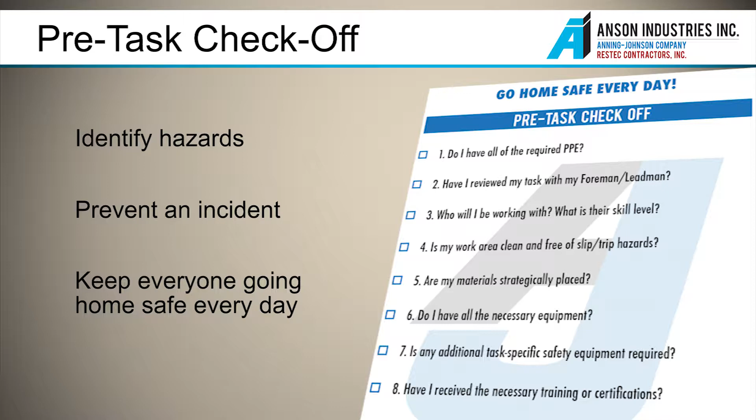If you are injured, report it to your foreman immediately, even if you are not sure if medical treatment is necessary. You will be required to complete an accident report. This will help us identify the cause and how we can avoid future injuries. If your injury does not allow you to return to regular duty, we will try to bring you back to work through restricted duty. Our goal is to make sure all of our workers receive the treatment they need and return them back to work.

Anson's core values represent who we are and provide the standard of behavior by which we conduct business. The following items are examples of the professionalism we expect from all employees. It is our level of professionalism that sets us apart from the rest of the industry. A professional is someone who lives up to the full potential of his or her capability and job title, no matter their level of education or the industry in which they work.

A professional conforms to the standards of skill, competence, or character normally expected of a properly qualified and experienced person in a work environment. Code of conduct: when working with customers, treat our customers with respect at all times. Remain positive under all circumstances. Be candid and honest in communication and conduct. Follow through on all commitments. Be prompt and responsive in business dealings.

When working with your coworkers, ensure that safety is a top priority and the focus of the entire team. Ensure that the team treats one another with dignity and respect, regardless of position, time with the company, or level of experience. Ensure that the team maintains a positive attitude, appearance, and demeanor. With everyone, refrain from vulgar language or behavior, and respect the dignity, rights, safety, and personal property of others.

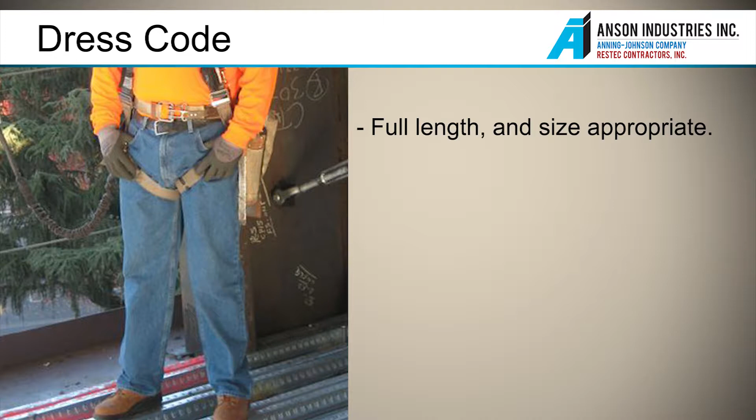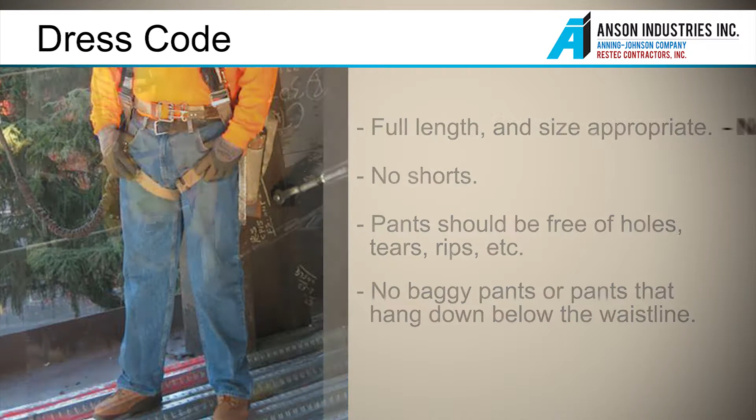Pants must be full length and size appropriate. No shorts. Pants should be free of holes, tears, rips, etc. No baggy pants or pants that hang down below the waistline. No loose jewelry. Work boots must be in good condition and free of defects.

Anson Industries provides equal employment opportunities to all employees and applicants for employment without regard to race, color, religion, sex, gender identity or expression, sexual orientation, national origin, age, veteran status, disability, genetic information, and any other classification protected by applicable law. In addition to federal law requirements, Anson Industries complies with applicable state and local laws governing non-discrimination in employment. This policy applies to all terms and conditions of employment, including recruiting, hiring, placement, promotion, termination, layoff, recall, transfer, leaves of absence, compensation, and training.

Anson Industries expressly prohibits any form of workplace harassment, discrimination, retaliation, or bullying based on race, color, religion, sex, sexual orientation, gender identity or expression, national origin, age, genetic information, disability, veteran status, and any other classifications protected by applicable law. Any questions or concerns should be communicated to your immediate supervisor or Human Resources Department immediately. Contacts can be found in the Employee Handbook.

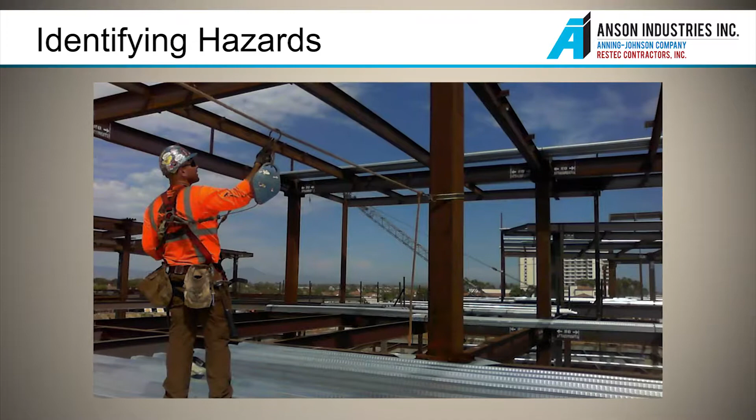We have created this video so you can become familiar with our safety policies and become familiar with the hazards on our job sites. We want you to be able to recognize and avoid unsafe conditions. We encourage you to notify your foreman of any unsafe conditions you may encounter, even if it does not pertain to our work, since it may help prevent an injury. Personal protective equipment.

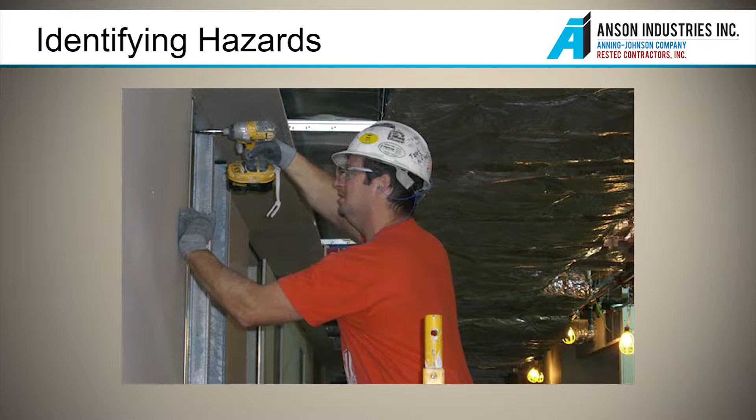It is our duty as your employer to provide you with the necessary equipment to work safely. We will provide all appropriate equipment except proper clothing or boots. The following are the types of equipment you will be required to use on our job sites.

Hard hats provide protection from falling objects or protect you in case of a fall. Hard hats must be worn at all times.

Safety glasses are required when cutting, welding, grinding, chipping, or using power tools. They can prevent flash burn or objects from getting into your eyes. Safety glasses must be worn at all times. If you wear prescription glasses, they must be ANSI Z87 certified with side shields. When using a chop saw, a face shield is also required.

Cleaning wipes will be provided on the job site so that they can be kept clean.

Hearing protection is required at all times. The OSHA standard requires protection when employees are exposed to an average of 85 decibels over an 8-hour period. We find that using our tools or the surrounding noise from other trades puts us over that average more often than not. Earplugs prevent hearing loss, which can develop over a long period of time when constantly exposed to loud noise. When putting them in, make sure your hands and earplugs are clean. If you need a different type of protection, ask your foreman.

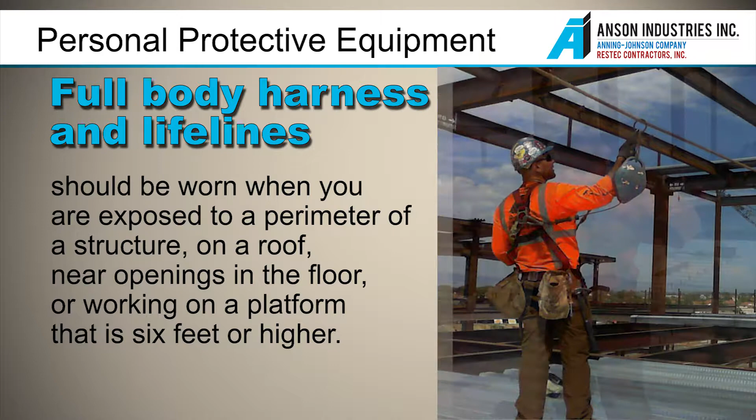Full-body harness and lifelines should be worn when you are exposed to a perimeter of a structure, on a roof, near openings in the floor, or working on a platform that is 6 feet or higher. This equipment should be inspected before use for frays or tears.

Respirators may be required depending on your trade. Any filtering face piece worn with 2 straps is considered a respirator. Training and a physician's written opinion is required before use of a respirator. Dust masks are not considered respirators, but are suggested for taping and fireproofing activities. Consult with your foreman on appropriate equipment for these operations.

Fall protection: when you are working 6 feet above ground, you must be protected by some type of fall protection. Some of the hazards of working above ground are unprotected sides and edges, openings in the floor, leading edges, hoist areas, and roofing work. If these hazards are present, your foreman will provide training on the fall protection and rescue plan that will be used on the job site.

The following are examples of fall protection. Guardrails, which must have a top rail at 42 inches and can withstand a 200-pound load, with a mid-rail at 21 inches, which can withstand a 150-pound load.

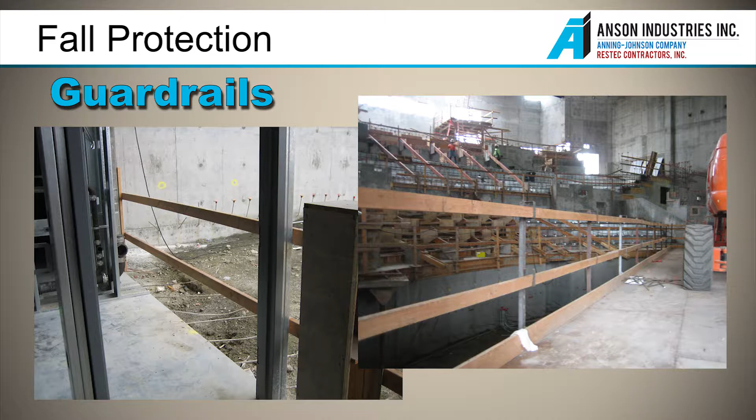Personal fall arrest systems are designed to hold your weight so you do not crash to the ground. It is made up of a 5-point harness, a lanyard or other deceleration device, and connected to an anchor point that can withstand 5,000 pounds per employee. The lanyard should attach on the harness between the shoulders.

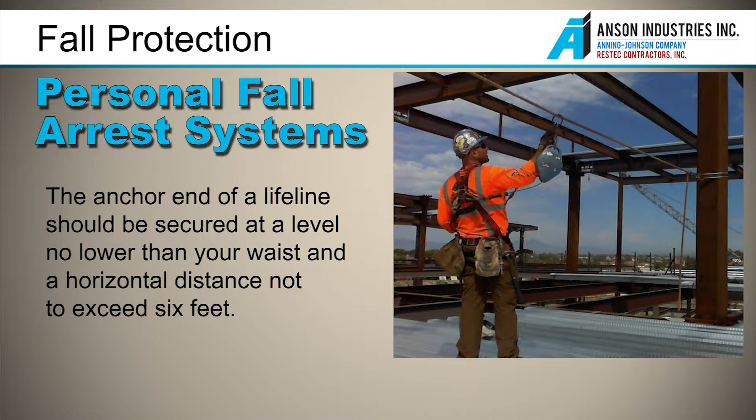Do not anchor to guardrails, railings, scaffolds, ductwork, or anything else you are not sure of. The anchor end of a lifeline should be secured at a level no lower than your waist and a horizontal distance not to exceed 6 feet. The anchorage should be able to support at least 5,000 pounds.

A warning line can be used around roof edges. The line should be at least 6 feet from the edge of a roof. Some other type of fall protection should be used with the warning line.

A controlled access zone can be used in leading edge work, which gives accessibility only to those employees who are performing work. A safety monitoring system is when a competent person is responsible for warning employees when they are working in an unsafe manner or unaware of a fall hazard. They must be on the same level as the employees, within visual sight of them, and have no other responsibilities.

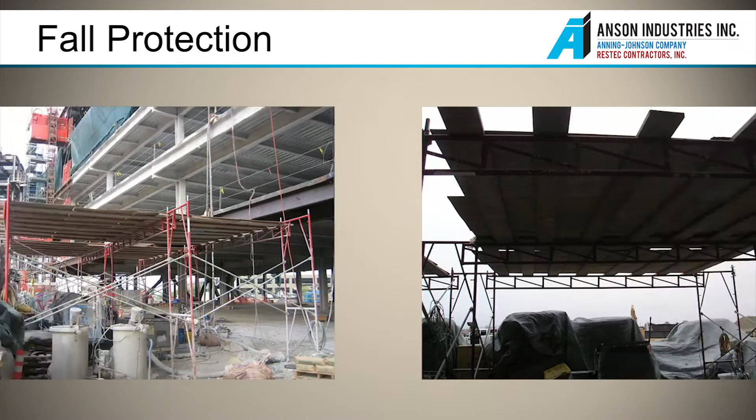All holes 2 inches in diameter or larger must be covered and marked. The cover must be secured and can support 2 times the maximum intended load. To protect you from falling objects, toe boards or canopies can be used.

Ladders: proper ladder selection, inspection, and use can prevent falls and injuries. Use a ladder, not a bucket or box, to reach heights. When selecting a ladder, make sure it is tall enough to reach the height needed and can hold 4 times the weight of you and your equipment.

Metal ladders should not be used for electrical work or when it can come in contact with electricity.

Inspect every ladder before using it. A ladder should have no missing parts, no splinters, sharp edges, dents, or bent parts, tight support braces, bolts, screws, and spreaders, slip-resistant steps, rungs, or cleats, and be free from wet, grease, or oil. The base should have safety feet or some form of non-skid anchorage.

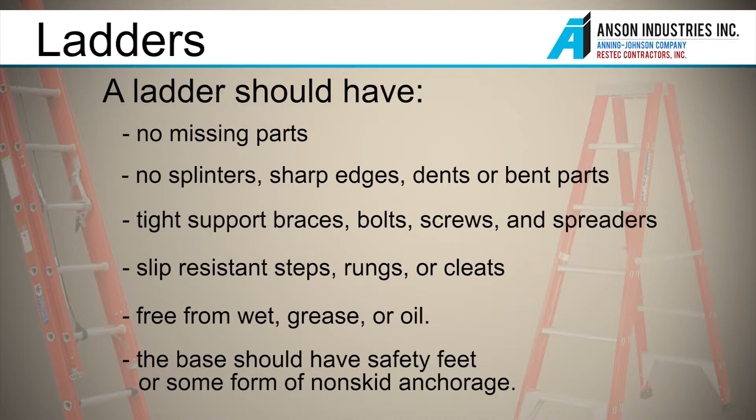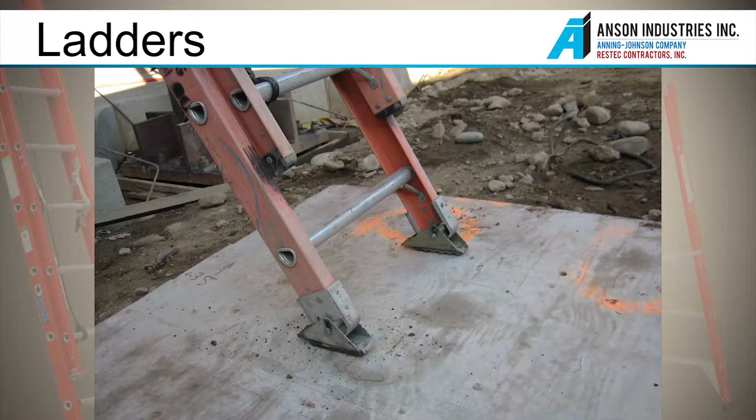If any defective parts are found, do not try to fix it yourself. Tag and remove it from service so others do not use it. Place the ladder on a suitable surface and position the feet to prevent displacement of the ladder base. If the ground is soft or broken, place the ladder on wide boards.

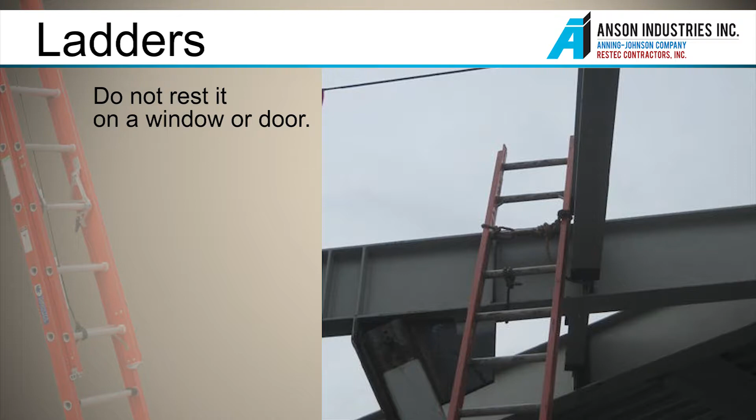Extend the ladder at least 3 feet above the top landing surface and anchor the top. Do not rest it on a window or door. Unless protected by a barricade, do not place ladders in passageways or doorways where other work is being conducted.

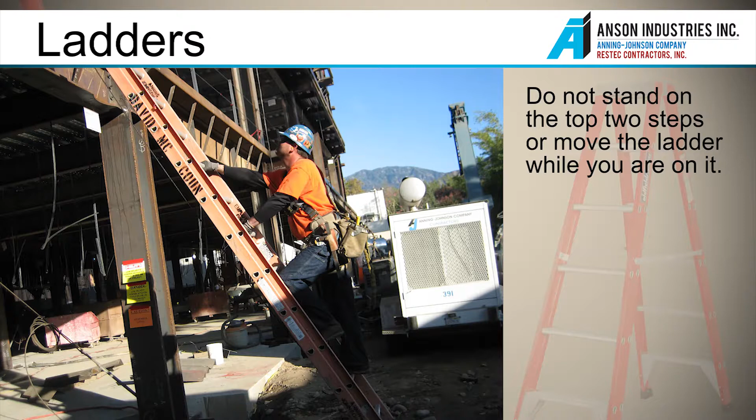When climbing, face the ladder and hold onto the rungs as you climb. Carry tools on a belt, rope, or hoist. Allow only one person at a time on the ladder. Do not stand on the top 2 steps or move the ladder while you are on it.

When carrying ladders, balance the center on your shoulder, keep the front end above your head and the back end near the ground. If it is too heavy, ask another person to help. Store ladders standing up in a dry, ventilated area.

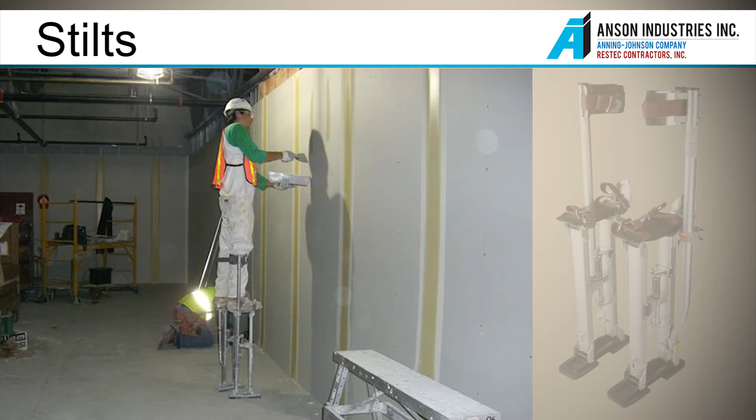Stilts. Stilt use is allowed in all of our offices except for California. They are a tool that can help you be more productive. They take the place of a ladder or a bench. Ceiling men, tapers, and metal stud framers can all use this tool.

Here are some safety rules for stilts. Review the stilt checklist every day before you use stilts. Check your stilts for damage before you get on them. If you do find damaged parts, change them immediately.

Survey the area you are going to work in and look for any type of hazard. Also check above for any type of safety hazard. Cover any floor openings and especially look out for trip hazards such as loose wires, rope, short pieces of conduit, screws, and electric cords. Always fasten the top strap first when putting on your stilts to help keep your legs in them properly.

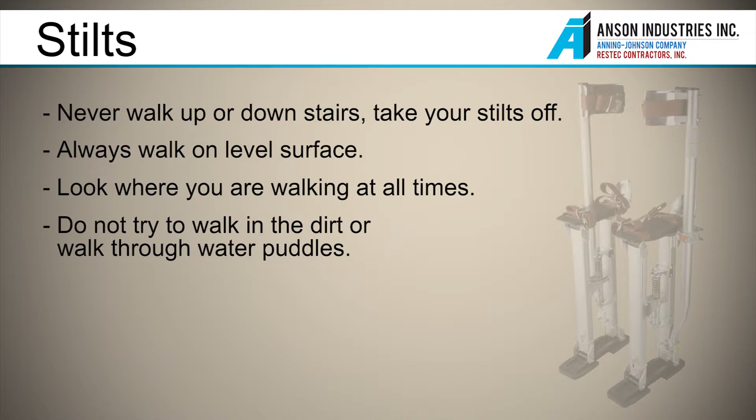Never walk up or down stairs. Take your stilts off. Always walk on level surfaces. Look where you are walking at all times. Do not try to walk in the dirt or walk through water puddles. Ask for help if you drop something on the floor.

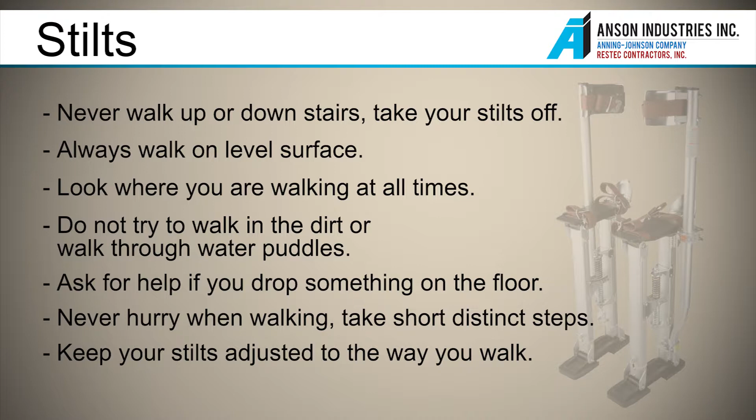Never hurry when walking. Take short, distinct steps. Keep your stilts adjusted to the way you walk. Make them as comfortable as possible. Take corrective action and you will have a safe and productive day while wearing your stilts.

Scaffolds. The most common causes of injuries on scaffolds are planks or supports giving way, employees slipping or tripping on the scaffold, and being struck by falling objects.

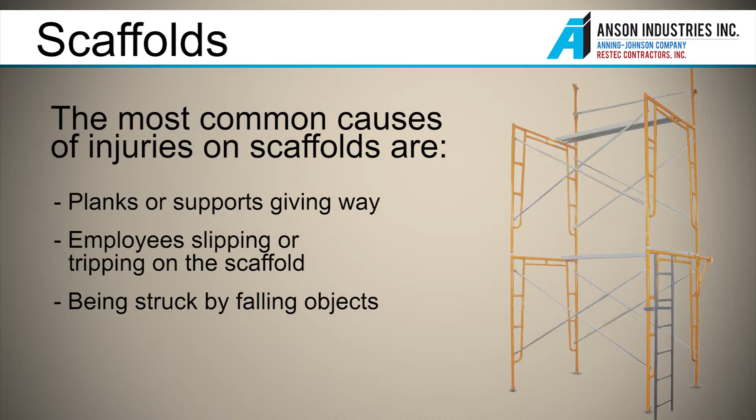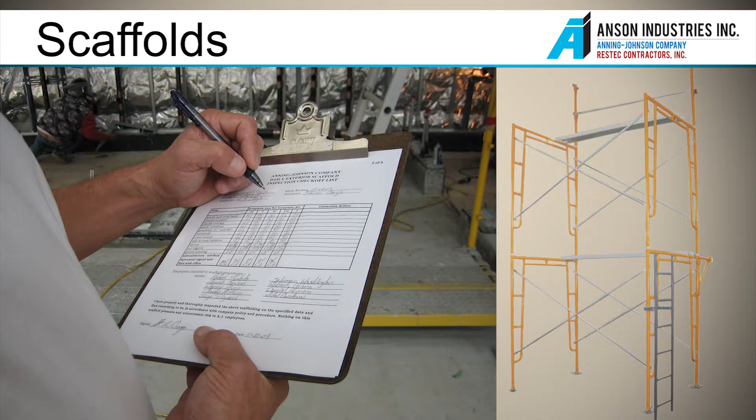A scaffold is any temporary elevated platform, supported or suspended, and its supporting structure, including points of anchorage, used for supporting employees and materials. A competent person, usually your foreman, is responsible for daily inspections, having knowledge of fall protection, erecting and dismantling scaffolds, and the recognition of hazards and unsafe conditions of scaffolds.

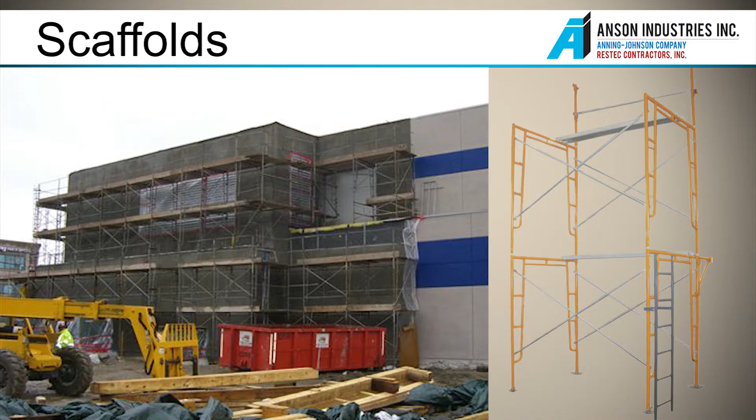They are also responsible for training all of those who use the scaffold. You need to be aware of some basic information when you are working on a scaffold to assist you in recognizing hazards to prevent injury.

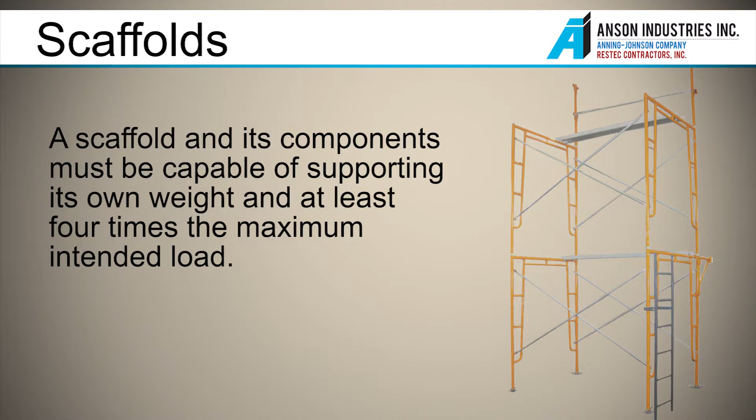A scaffold and its components must be capable of supporting its own weight and at least 4 times the maximum intended load. Scaffolds must be erected on firm ground. Each platform must be fully planked and decked between the front uprights and the guardrails. Guardrails should be installed along all open sides and ends of platforms. The top rail should be 42 inches with the mid-rail at 21 inches.

If guardrails are not available or appropriate, personal fall arrest systems must be used. They should be attached by a lanyard to a vertical or horizontal lifeline. Do not attach to the scaffold unless there are manufactured anchorage points designed for that purpose.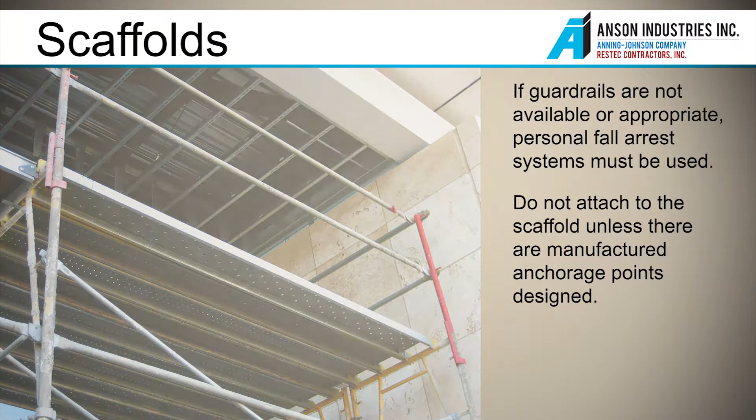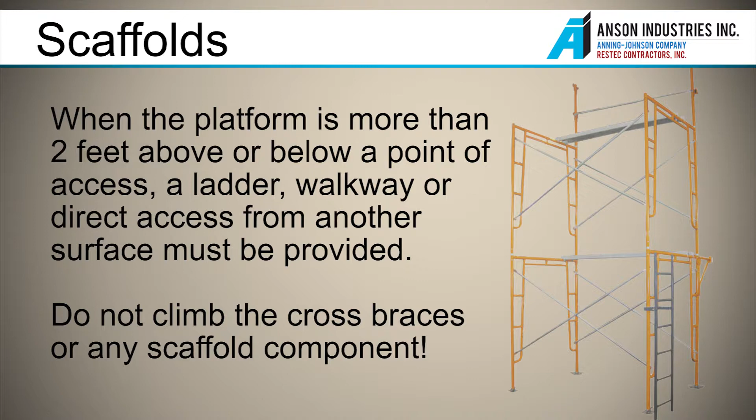When the platform is more than 2 feet above or below a point of access, a ladder, walkway, or direct access from another surface must be provided. Do not climb the cross braces or any scaffold component.

Scissor lifts and boom lifts. To operate any aerial type of equipment, you must first have training or documentation to prove your knowledge on the use of that particular piece of equipment.

Here are some common responsibilities and safe practices. You should inspect the equipment every day for defects. Before starting the equipment, make sure the dead man switch works. Look for unsafe conditions such as drop-offs, holes, slopes, bumps, debris, overhead obstructions, and wind and weather conditions. Get rid of or adjust to these hazards before use.

Prior to each elevation of the platform, guardrails are installed. Gates or openings are closed. The load on the platform is evenly distributed. Harness and short lanyard must be available.

They need to be worn if the general contractor requires it, when in a basket extended by a boom, or when you are leaning and reaching beyond the safety rail of the lift. The anchorage point must be engineered or approved by a qualified person.

Do not climb on guardrails or use any other types of devices to reach heights from platforms such as ladders. Do not continue use if there is a malfunction. Do not travel while the lift is up. Do not position platform against any object to steady the platform.

Do not operate equipment near electrical power lines. Do not alter or disable any safety devices. Do not let any other company use the equipment.

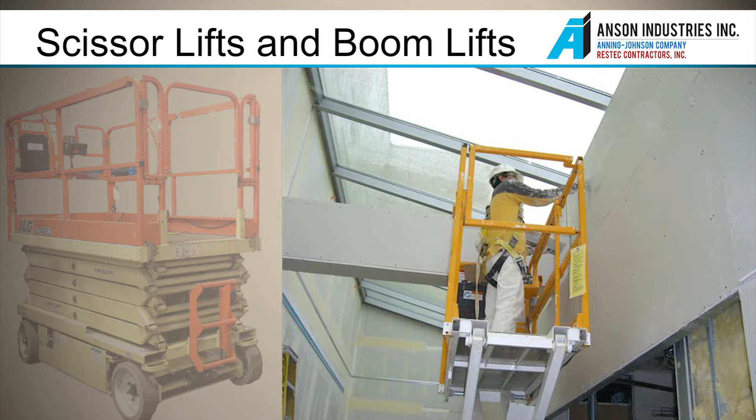Housekeeping. One of the most unrecognized hazards is material and trash on a job site. The pre-task checkoff specifically asks you to review your area before performing work. If there is a housekeeping issue, notify your supervisor. At all times, your work area should be kept clean, especially passageways, stairs, and aisles.

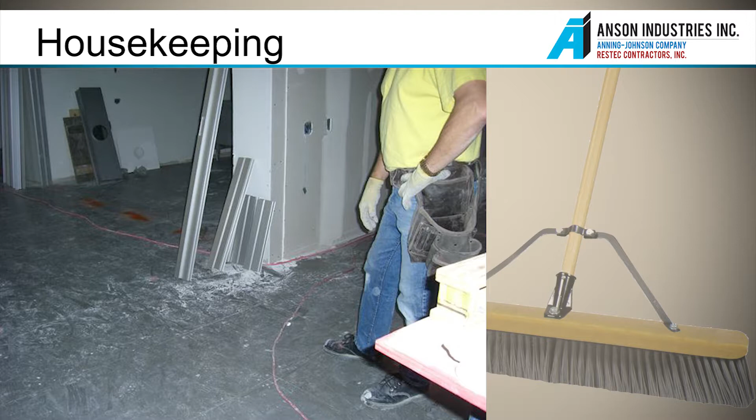People may not be watching where they are walking or carrying something that prevents them from seeing what is ahead. This may cause them to trip and fall or twist an ankle. Here are some helpful tips to prevent you and others from getting injured.

Trash and debris or scrap materials should be kept in one designated space, organized and out of the way of any work being performed, and then removed daily. All trash should be placed in receptacles and removed periodically. Do not overload receptacles. Hammer all loose nails so they are even with material.

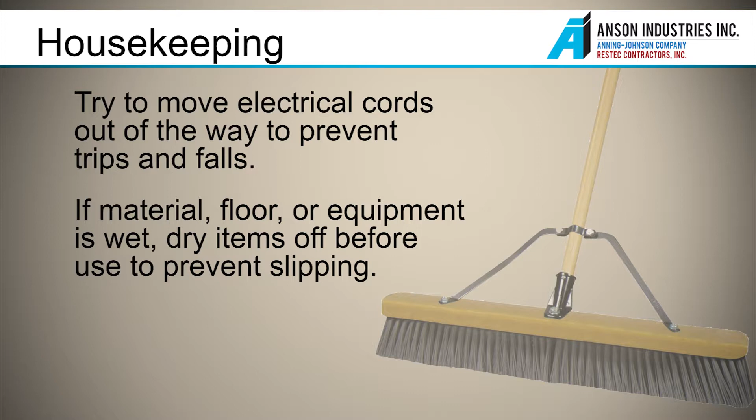Try to move electrical cords out of the way to prevent trips and falls. If material, floor, or equipment is wet, dry items off before use to prevent slipping. If you are starting work in an area after another trade has finished, do not let their trash sit there. Speak to them or the general contractor so it is removed and not causing a hazard.

Do not throw material off of a roof or elevated floor. When necessary, have a coworker be a spotter to keep people out of the area and put barrier tape around the perimeter. A clean job not only makes a job safe but productive. Our customers will also appreciate it.

Electrical safety. Careless use of electricity causes 10% of job-related deaths, as well as many serious injuries. Workers need to protect themselves when working around live wires and parts. If you find a temporary or permanent electrical panel with exposed wires, do not work in the area and notify your foreman immediately.

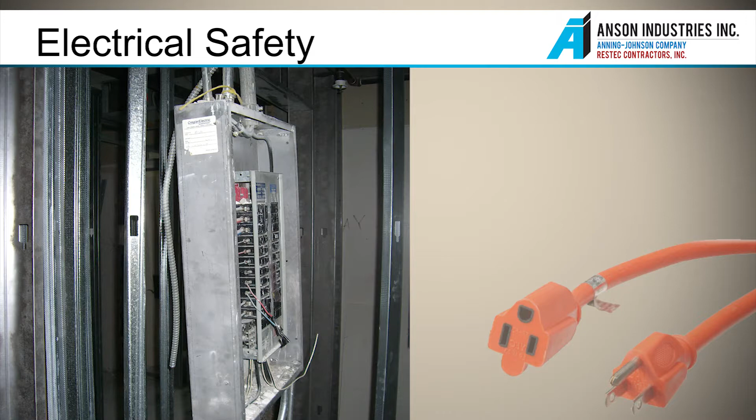The ultimate electric shock is electrocution, and it doesn't take much electrical power to kill you. It can also cause you to fall and be injured, cause loss of muscle control and coordination, internal bleeding, and damage to nerves. To use electricity safely, you have to be able to identify its most common hazards.

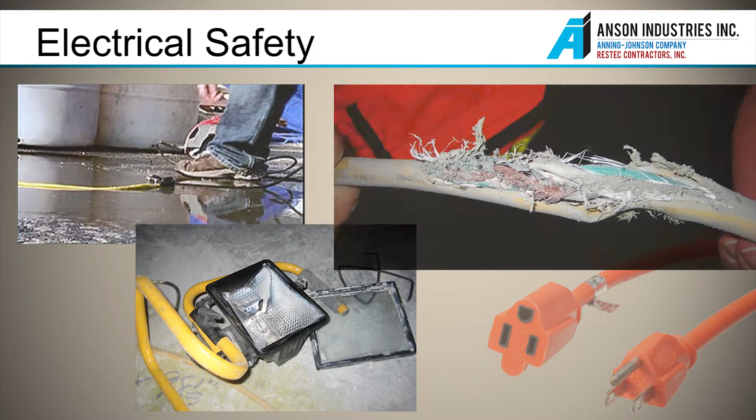Most occur in everyday work. Electrical repair should be left to skilled, trained people. So, if you spot one of these hazards, don't touch anything. Report it immediately so repairs can be made.

Here are the hazards to watch out for: loose electrical connections, missing ground prongs, cords with no insulation or frayed insulation, plugs that don't match their outlets, like a 3-pronged plug in a 2-pronged outlet, equipment running over capacity, tools that smoke, smell, spark, or shock, electrical cords left near heat or water, wearing jewelry like watches or rings.

Workers and the objects they hold must stay at least 10 feet from an energized power line. Vehicles usually have to stay at least 10 feet from the line also, unless insulating barriers or similar protections will prevent contact. If there is an accident, don't touch a shock victim. Call for professional medical help and, if you can do it safely, turn off the power that's giving the shock.

Use something that will not conduct electricity to push the person away from the wire or equipment that caused the shock.

Hazardous chemicals on the job site. Many different chemicals are found within the materials we use on a job site. Knowledge of chemical hazards in the workplace is essential to your safety. So, how can you tell if a chemical is hazardous?

The Globally Harmonized System, GHS, provides a single, common approach to classify hazardous chemicals through container labels and safety data sheets. Read the label. The manufacturer will label all materials we use that have 6 elements.

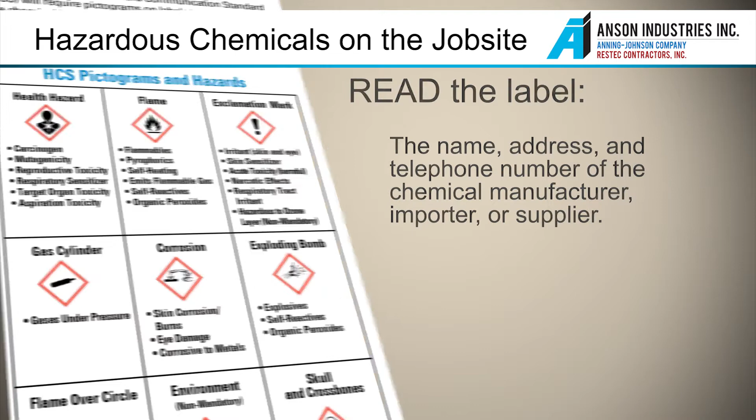The other way to find out about chemical hazards is by a safety data sheet, or SDS. The sheet has 16 sections that provide hazard assessment. Safety data sheets are kept either in a binder or can be accessed online through the SiteHawk website. This gives you the ability to review them at any time.

Once you understand the relative hazards of chemicals you work with, it is very important that you follow directions given and wear protective equipment if required. If you have any questions or concerns regarding the products you are using or exposed to, contact your supervisor.

We can also be exposed to chemicals by other contractors on the job site. We are to be notified of these hazards, but we cannot rely on being informed by others. A good rule of thumb to follow is, if your eyes or lungs become irritated, the atmosphere is too strong to work. If this occurs, get out of the area and tell your foreman so appropriate action can be taken.

Backs and lifting. Thousands of at-home and at-work injuries are related to improper body movement. Your back takes part in almost every move you make. That makes them more prone to injury.

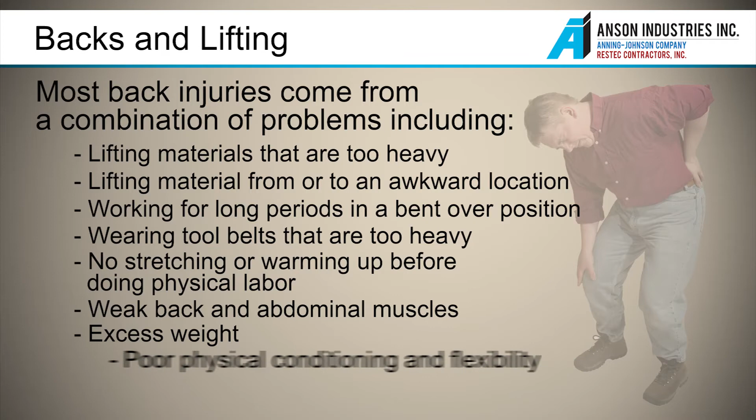Most back injuries come from a combination of problems, including lifting materials that are too heavy, lifting material from or to an awkward location, working for long periods in a bent-over position, wearing tool belts that are too heavy, no stretching or warming up before doing physical labor, weak back and abdominal muscles, excess weight, poor physical conditioning and flexibility, poor sitting and standing posture.

We have a warm-up program where your foreman leads a stretch for the first 5 minutes of the day. We also encourage you to stretch after repetitive work or your break or lunchtime.

Before you lift, first determine the weight of the item to see if you can safely lift and carry it. If in doubt, use a dolly, hand truck, forklift, or ask for help. Watch for tripping hazards. When you lift, stand close to the load with your feet shoulder-width apart.

Bend your knees and keep your back straight. Grip the load firmly and bring it close to your body. Push up slowly with your legs, not your back. Carry the load waist high and do not twist.

When reaching overhead, use a ladder to bring the load closer so you do not have to reach above your shoulders, and follow the other lifting techniques. Healthy habits, including staying in shape and eating healthy, also play a part in your well-being. Maintaining a healthy lifestyle will enable you to lengthen your career and provide for your family.

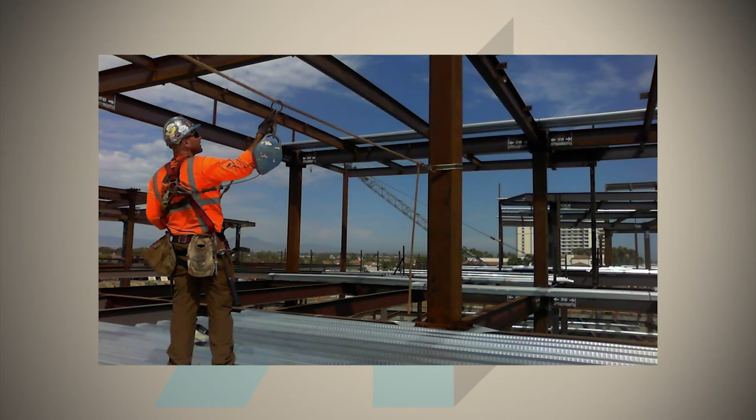This is the end of your initial training. We expect you to follow the safe practices reviewed, and we encourage you to identify any hazards so that we can provide a safe working environment. This is only an introduction. Every tool and task has more specific training. Knowledge is important for you to have to keep you safe.